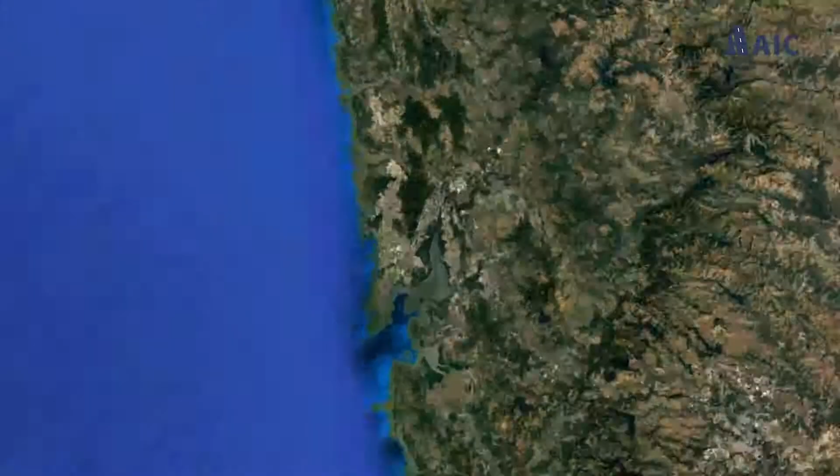India's premier airport in Mumbai, the Chhatrapati Shivaji Maharaj International Airport, is developed, operated, modernized and managed by Mumbai International Airport Limited, a consortium led by GVK. It is located in the financial capital and a key gateway to the country, playing a crucial role in aiding the city retain its premier position and fast-paced growth.

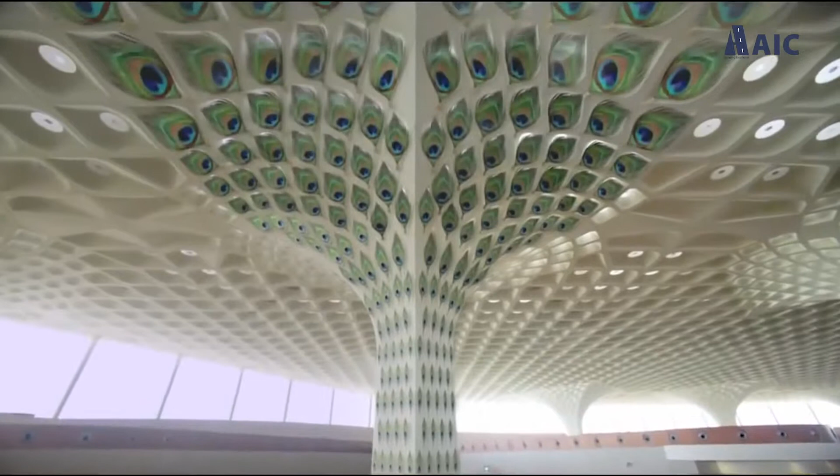The Mumbai airport is known to be the busiest single runway airport in the world. On most days, this airport handles over 1,000 aircraft movements and approximately 140,000 passengers. This means there are 2 flights taking off or landing every 3 minutes. It integrates world-class design, architecture, infrastructure, and operational efficiency.

Mumbai Airport has 2 cross runways, 09/27, the main runway, and 14/32, the secondary one, which intersect, making only one of the 2 runways operational at any given time. The amount of traffic entails a lot of wear and tear, and runway operations is a 24/7 responsibility.

Runway pavements are exposed to different stress as compared to other pavements, like air traffic movements, weather exposures, and oxidization of surfaces. Over time, the surface gradually begins to weaken and needs to be resurfaced. In order to ensure safer operations, it is essential to give it new life by milling and resurfacing with hot mix asphalt layers over the existing surface.

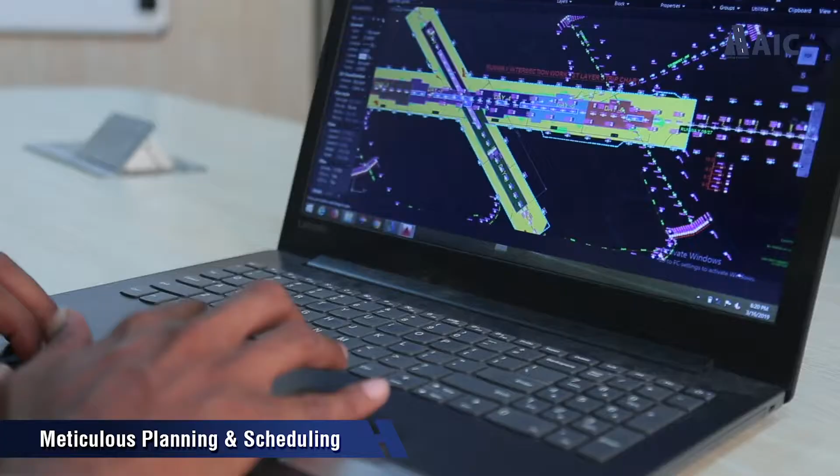The mammoth task to strengthen and resurface the super busy runways was entrusted to AIC Infrastructures Private Limited, Mumbai. AIC is focused on the field of infrastructure building and is specialized in construction and repairs of airfield pavements globally. It orchestrates projects with consistent quality and safety assurance with adherence to planned project timelines, all of this infused with the latest machineries and technologies.

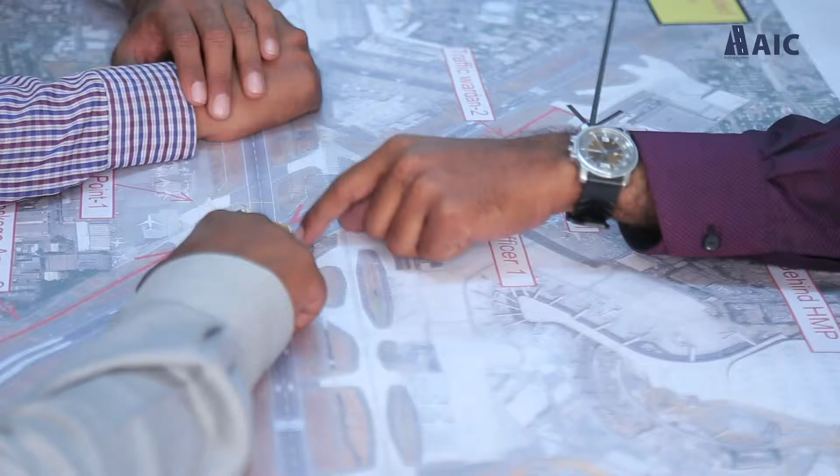The experienced airport team executed this project with the best of quality and safety practices. Working closely with the airport engineering, airside operations, and security teams, the AIC engineering team planned the work meticulously to ensure that they hit the designated target of start and end date.

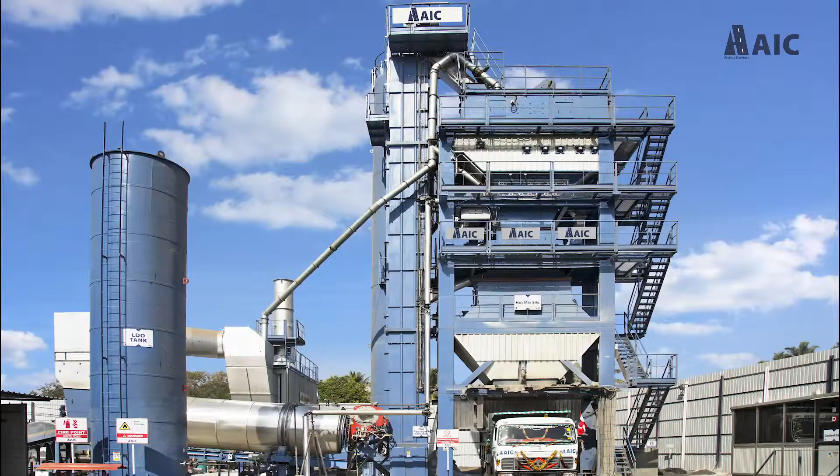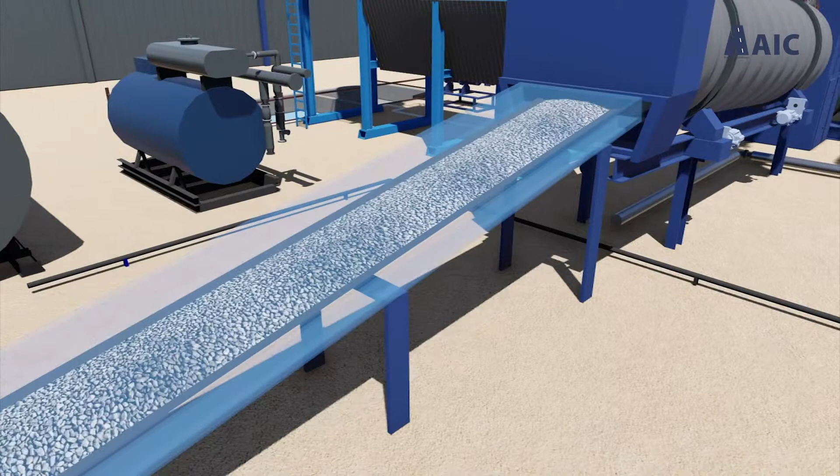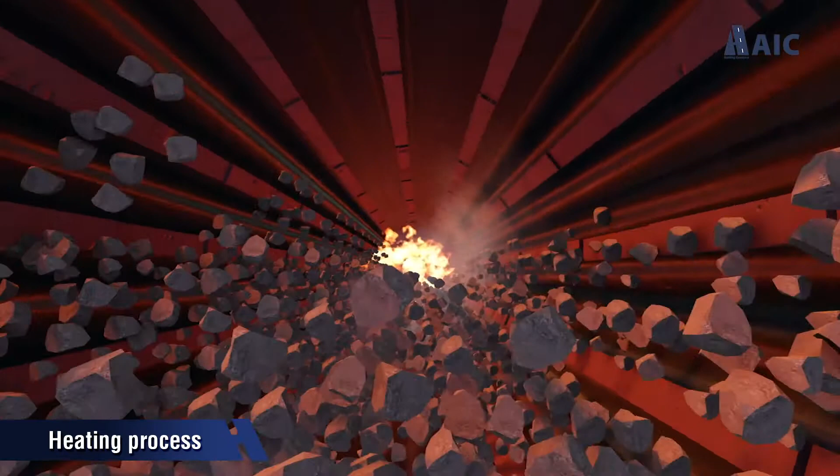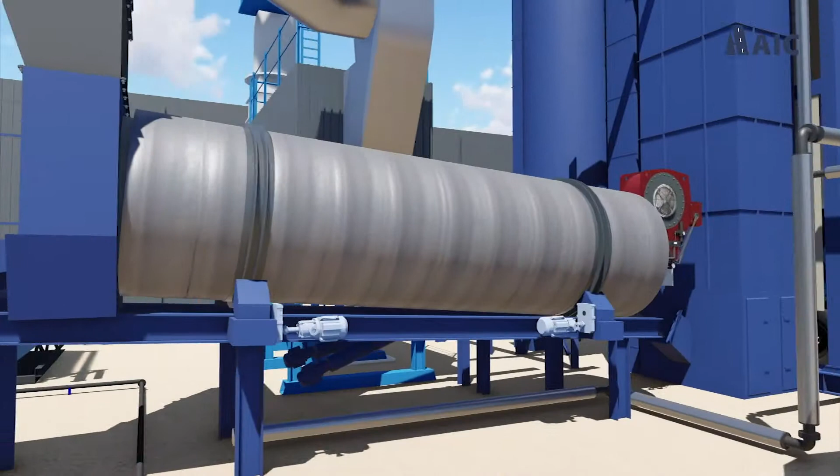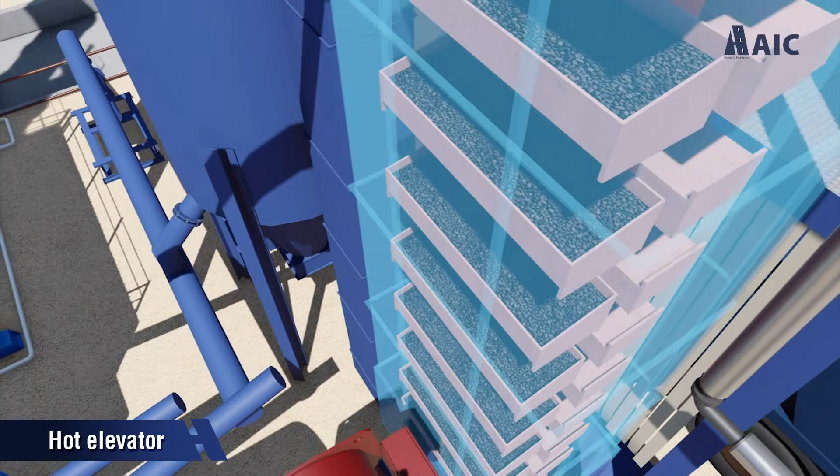During the process, the aggregates were heated in the insulated drum to ensure that the temperature of the mix was achieved. The aggregates were then separated and graded into different sizes by vibrating screens.

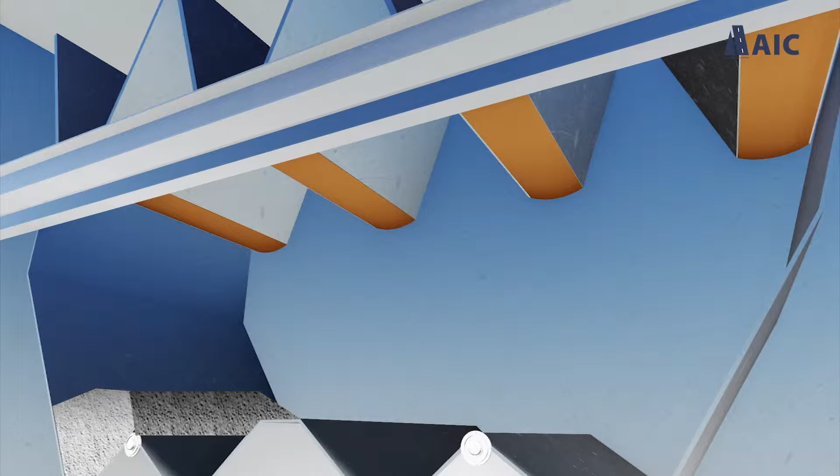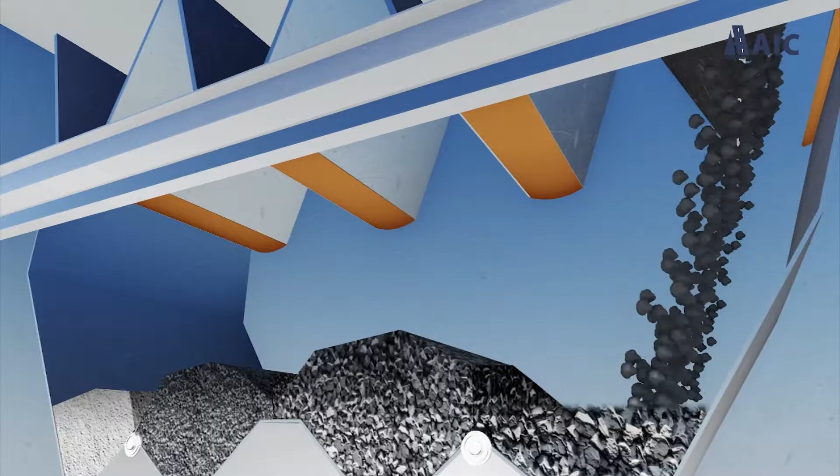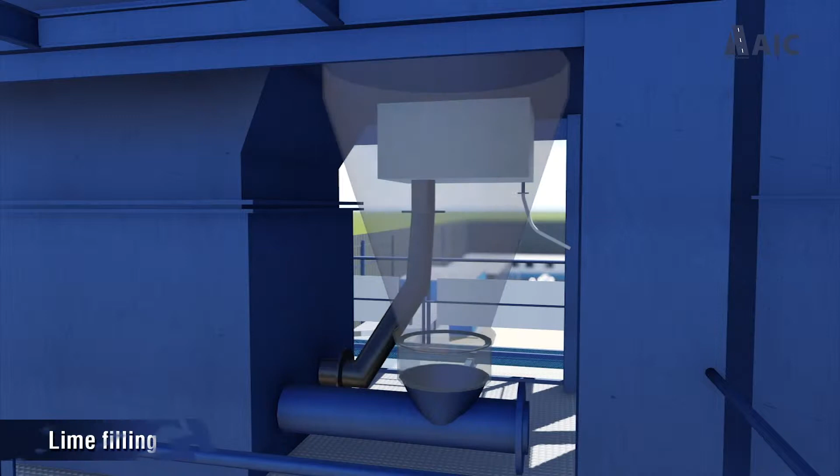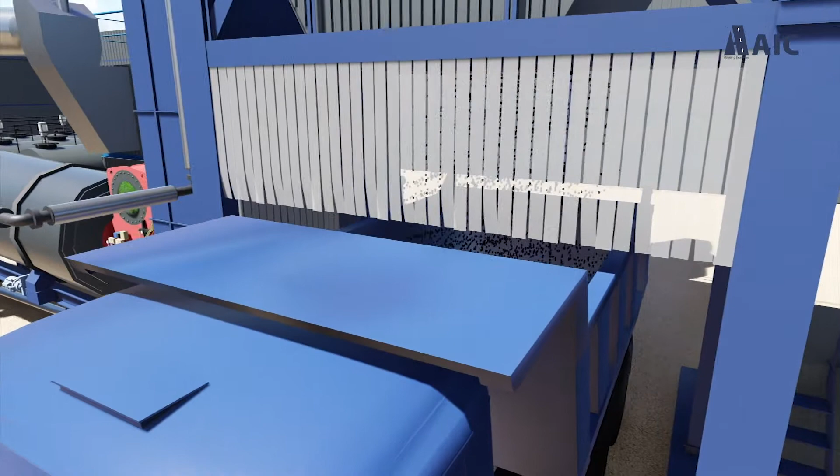The hot bitumen was fed up into the hopper via this feeding pipeline, and the lime went up here. All the raw ingredients were mixed thoroughly for a predefined period to ensure the mix was homogeneous. Finally, the hot mix was unloaded into tippers. Tippers were kept covered to ensure that the temperature of the mix was retained for a longer period.

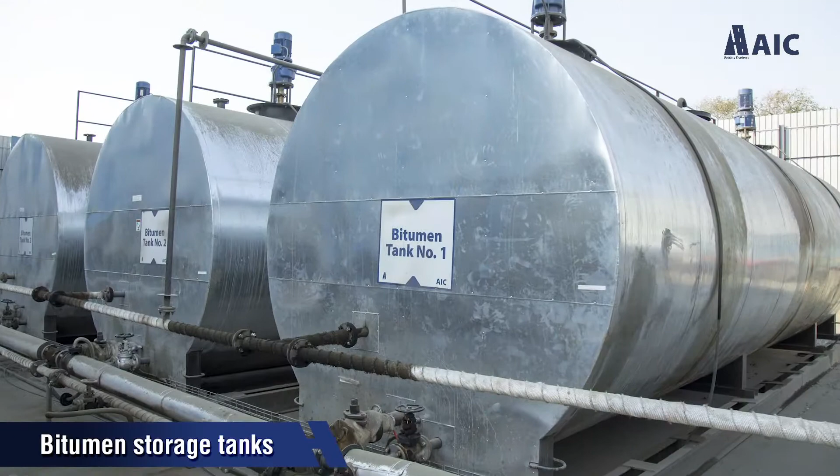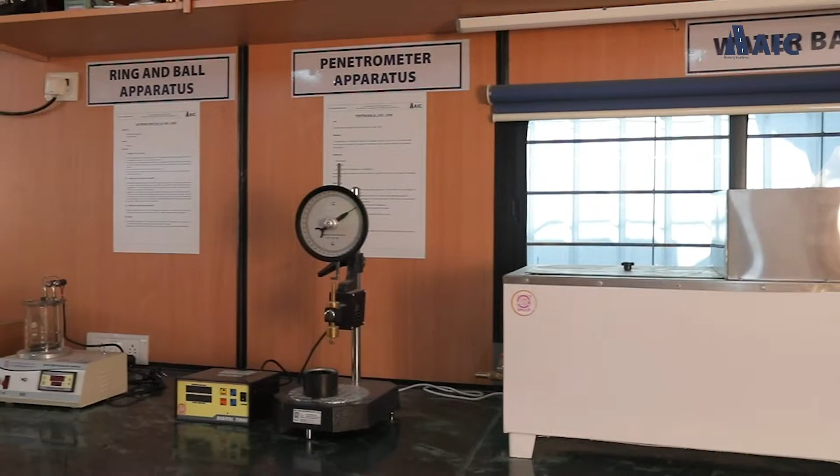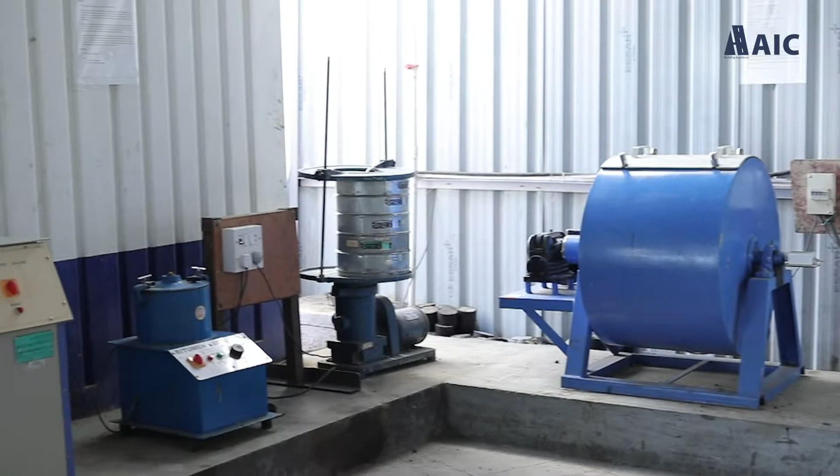The finest hydrated lime was sourced and supply lines were feeding regular consignments. The plant site was equipped with a state-of-the-art laboratory, where all raw materials were pre-checked before being used. The highly experienced professionals designed the asphalt mix and ensured that the hot mix plant produced the same. Continuous pre- and post checks ensured that the mix to be laid on the runway was of designed and desired quality.

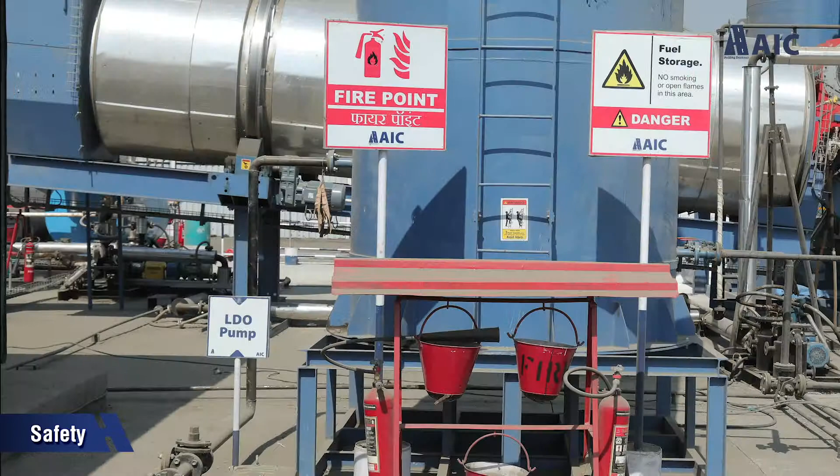All the environmental control procedures were followed and extra measures, unique to our global standards in India, were taken. A special water mist system comprising dust separators, separation sprayers and fog cannons was installed at the plant.

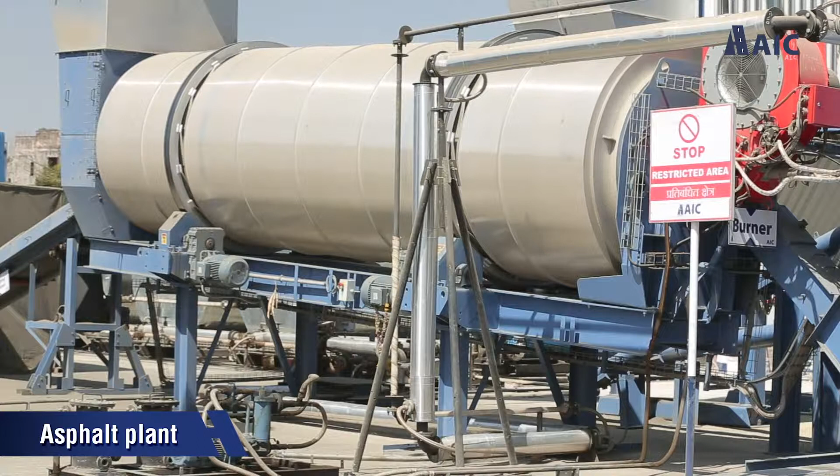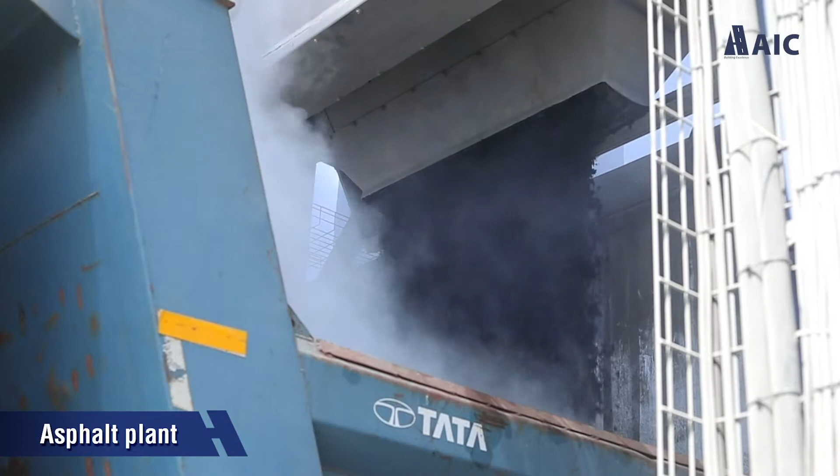Let us take a look at how this entire operation was carried out. Every second, every minute of the activity on site was planned to the minutest degree of perfection.

It was a race against time every time the airport was closed for operation. Every day before the commencement of the work, a daily runway safety briefing was conducted by a safety officer on runway safe work procedure.

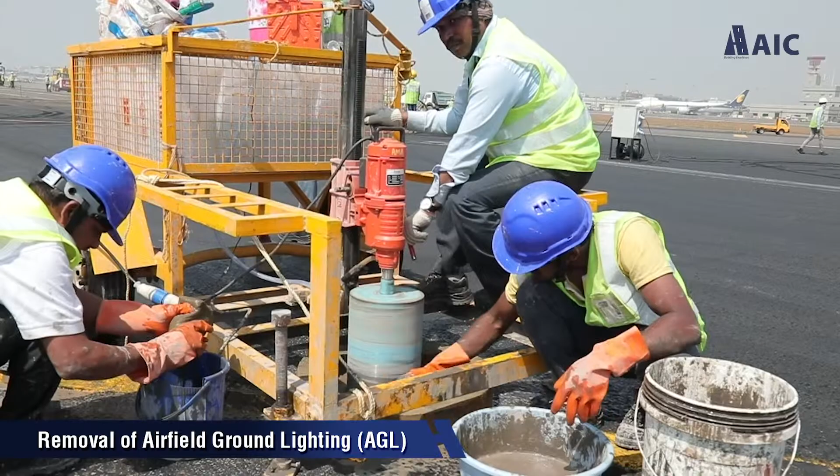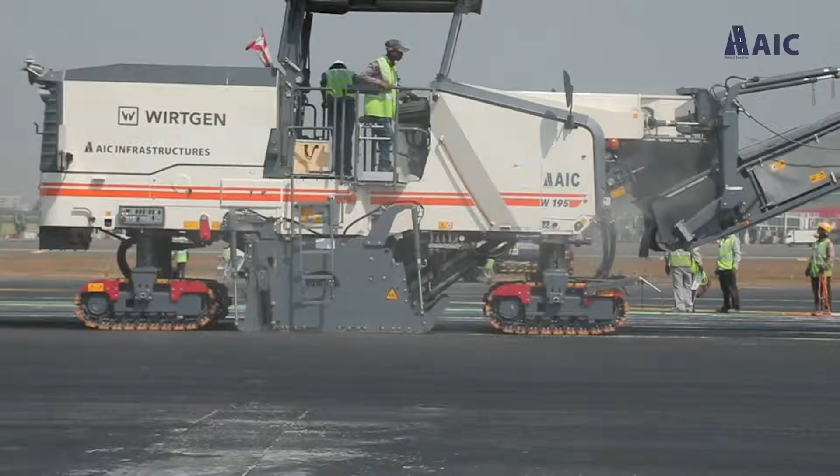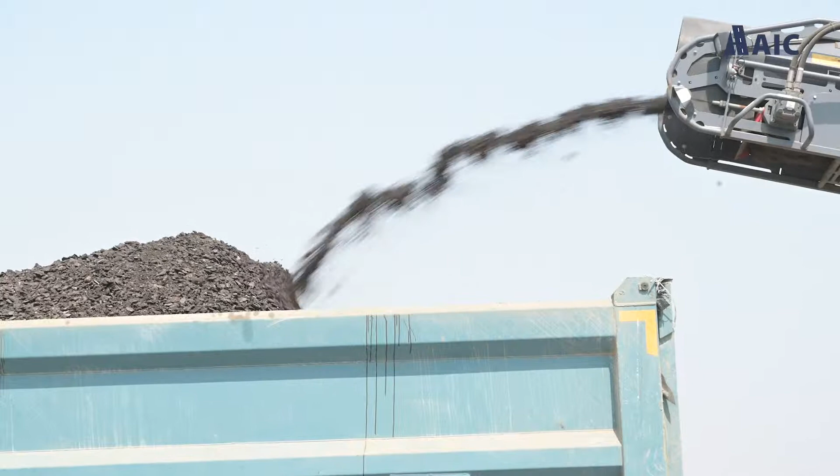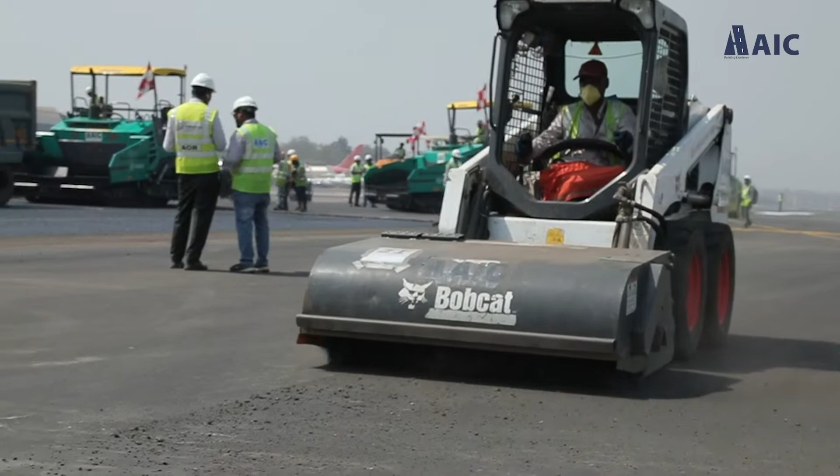A team cores and removes the existing AGL fitting and fills the void with a quick set concrete. Surveying machines determine the existing pavement levels to achieve design parameters. The high-powered milling machines start to mill the existing surface. Tons of milled material is disposed away from the runway simultaneously. The cleaners, bobcats and compressors follow the milling machines and clean the surface, making this a simultaneous sequencing job.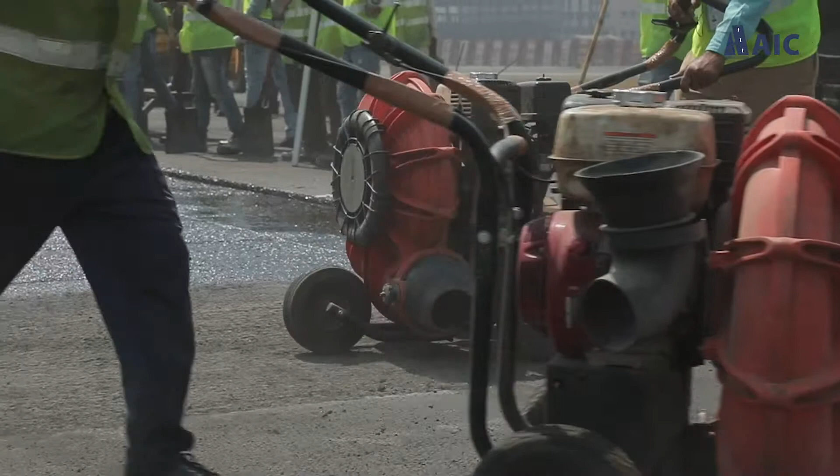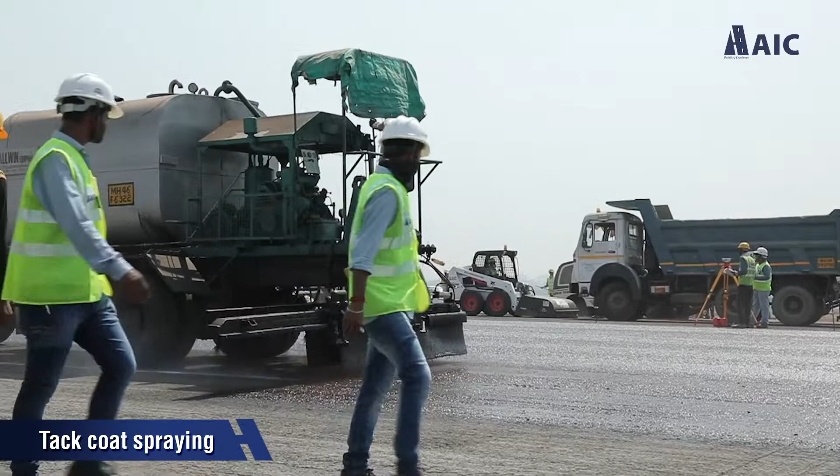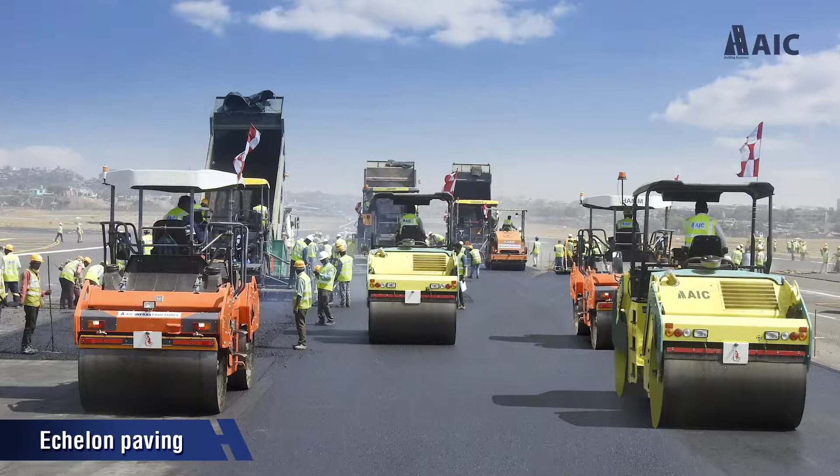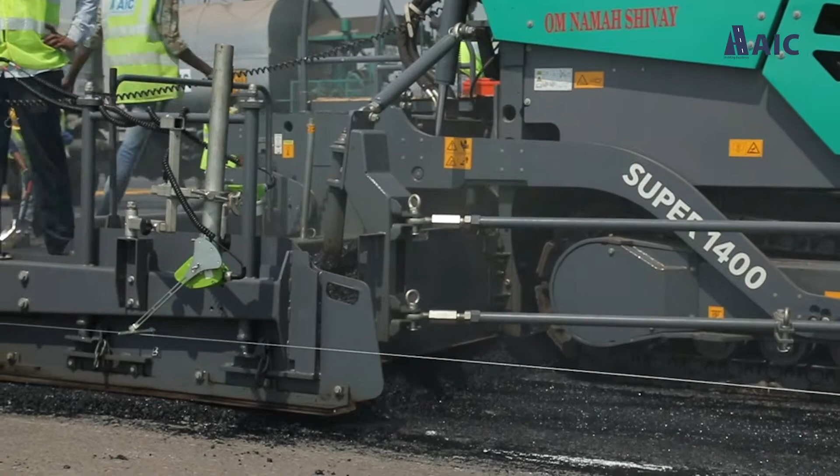After the cleaning, bitumen tack coat spray is applied on the surface by the automatic bitumen sprayer to improve the binding of the new asphalt premix. In no time, modern pavers equipped with high compaction screeds and automatic sensors leveling system begin laying asphalt over the surface. This echelon paving, with a fleet of pavers paving multiple lanes, is a rare sight to watch at any operational airport in India. Asphalt premix was designed jointly by MIAL and AIC as per the airfield specifications in order to provide strong wearing course to the runway.

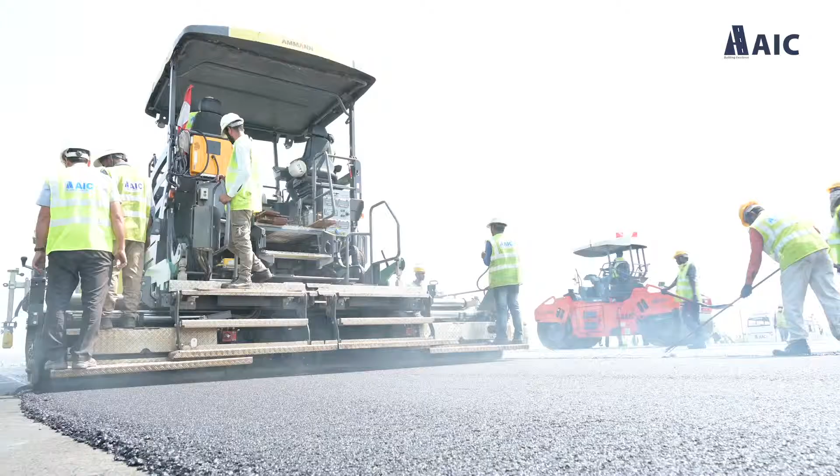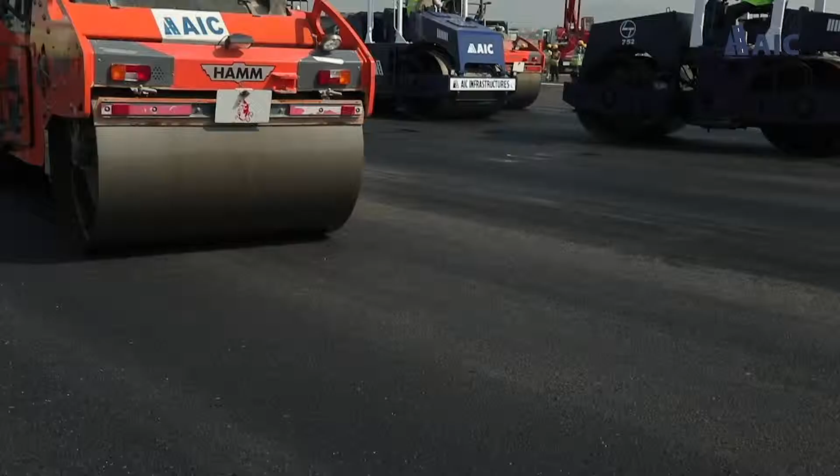Proper compaction of freshly laid asphalt is very essential. A fleet of tandem and pneumatic tire compactors begins the process till the compaction is achieved as desired.

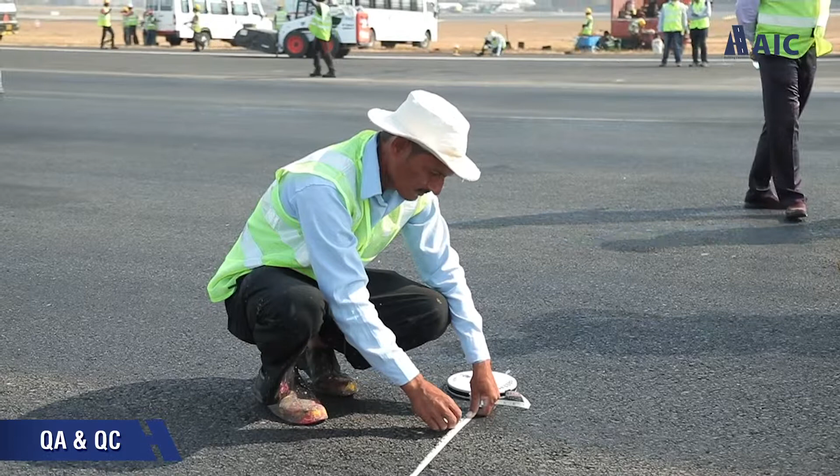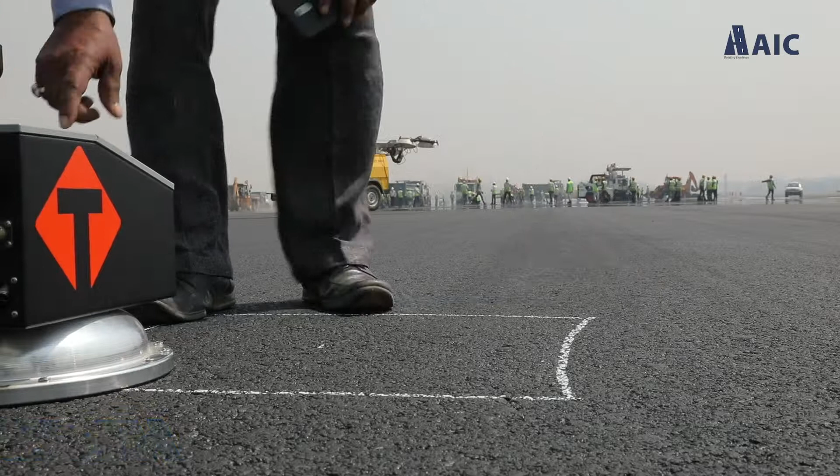The surveyor then performs the final check on the level, and the QA/QC team tests the compaction of the hot mix asphalt. The asphalt temperatures are constantly monitored. The AGL lights are fixed back in place.

The handing over process is initiated. This begins with a emu parade to look for possible foreign object debris on the surface. Once the quality checks are done, the final marking of the runway is reinstated.

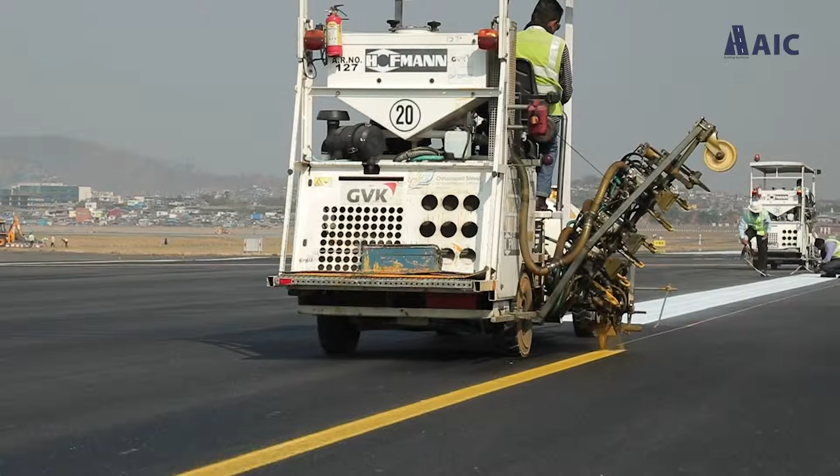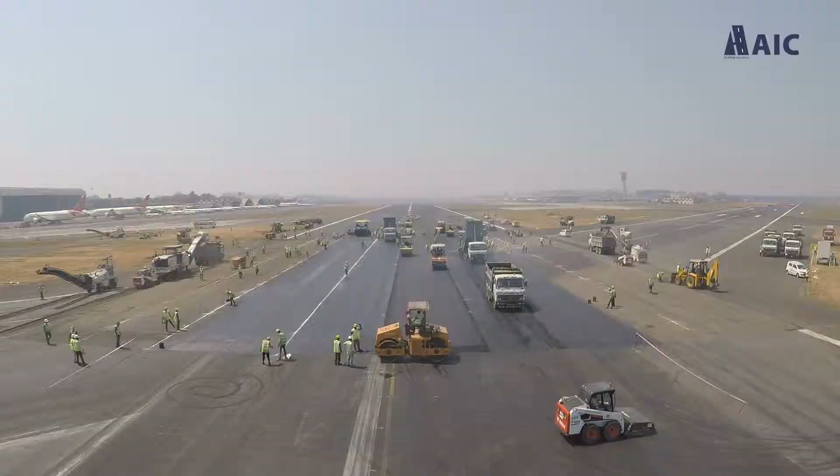As the signal is given, the entire fleet of machineries lines up immediately to vacate the runway. The runway is then handed over to the airside operations team for their final check well before the 1700 hours deadline. Every single minute counted. Hence, every operation was completed in an exactly predetermined time frame.

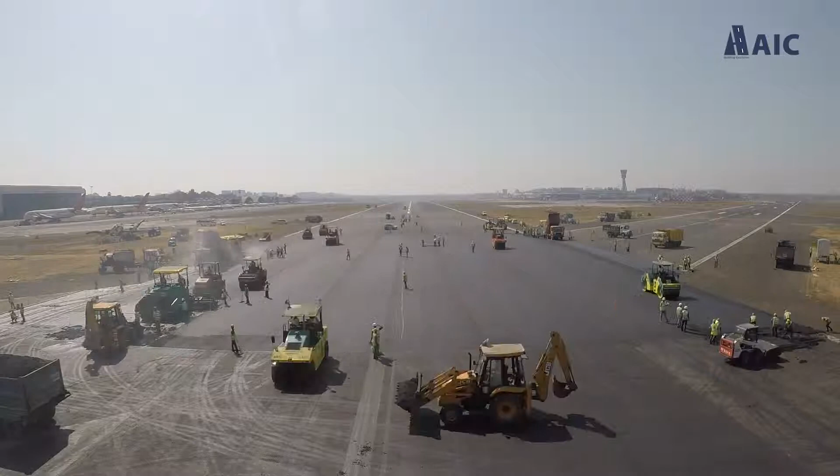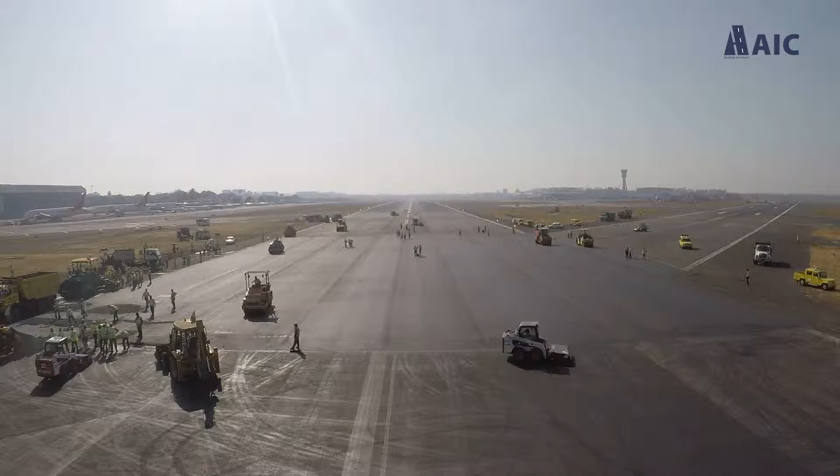The hallmarks of this resurfacing project at Mumbai International Airport were a superlative quality solution, impeccable safety practices, and flawless execution. It is a great testament to the professionalism and commitment of every single personnel involved that they were able to ensure the successful completion of such a crucial and prestigious project. Another feather in AIC Infrastructure's cap. Working in close coordination with Chhatrapati Shivaji Maharaj International Airport, MIAL, and GVK.